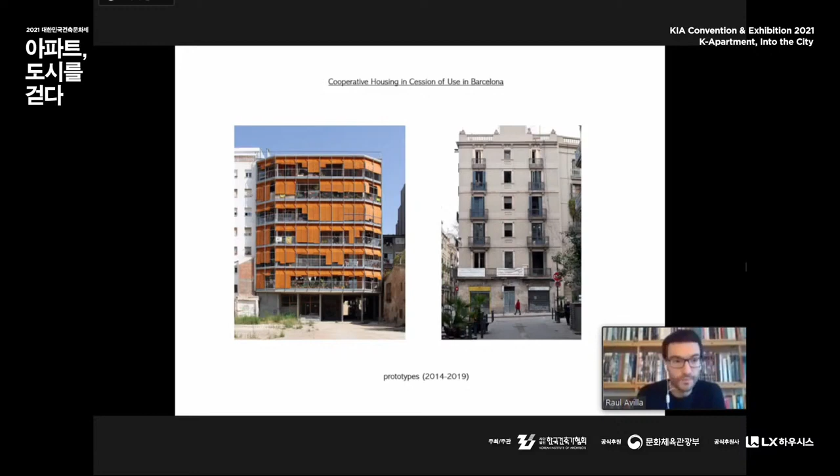Can Batlló, in this case, long story short, is part of an industrial settlement which had been claimed by grassroots groups as public facilities for many decades. Finally, in 2011, neighbors entered the premises and started self-organizing them with the permission of the administration, creating a number of working groups to address the public facilities, producing them in a self-managed way - claiming that since they were the ones producing and caring for them, they would be able to do better than the administration.

One of these was the housing working group, which produced the example of La Borda that I just mentioned, in this case mediated by a team of architects. They organized in an assembly - this is one of the first examples. Cooperative housing, in this case, cannot just be seen as a grassroots response to housing failures, but actually as a political project of democratization and social transformation, and this has a direct impact on how we understand housing.

In this case, dwellers decided to have less private space in their houses in order to foster these shared or collective spaces, given limited resources, referring to both budget and space. This produced a number of spaces which are actually extensions of the house, making the dwelling bigger than it actually is.

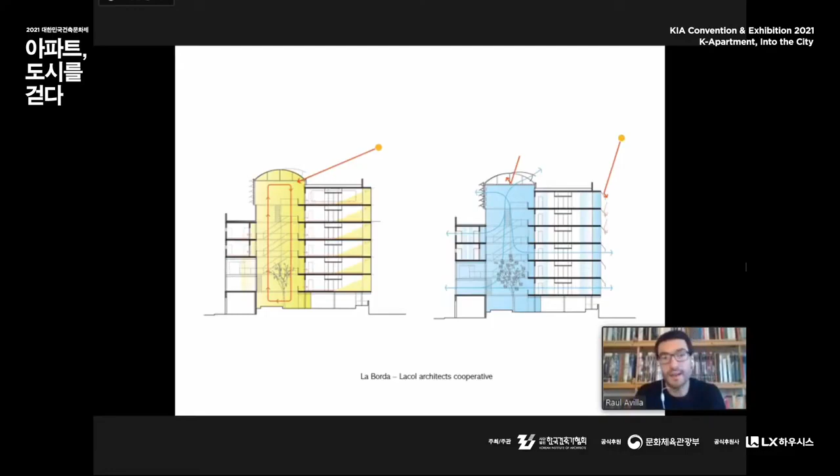One example was the design of a greenhouse in La Borda, which couldn't have happened in either private or public procurement. This was allowed since both ownership and management are collective, and it significantly improves the energetic performance of the building for the benefit of dwellers. On the other hand, it produces a pedagogical effect in the way users understand the carbon footprint of their own living.

On the other hand, the typology in this case is defined by three different sizes. As opposed to what we were looking at before, where household composition was predetermined, in this case that does not happen. There's freedom for users and households to interpret the dwellings, which are defined in relation to household size rather than composition.

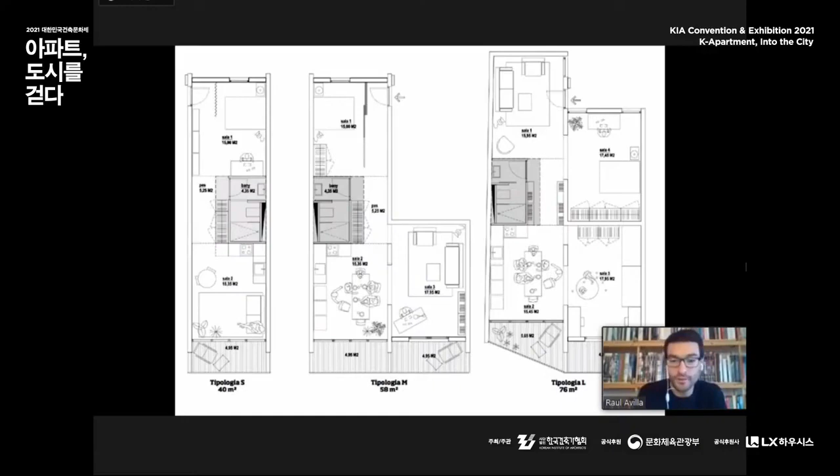In addition, there are some extra rooms that can shift from one dwelling to the other. So these houses are actually able to increase or decrease over time, allowing a higher degree of adaptability in the future. That's how the first floor plan looks.

Dwellings are facing south, where the sun comes from, while north is the place of utilities and shared spaces. If you look at this photograph, which is pretty much like a section of the building, you can see how these shared spaces are scattered throughout the building, allowing a higher degree of access for all dwellings.

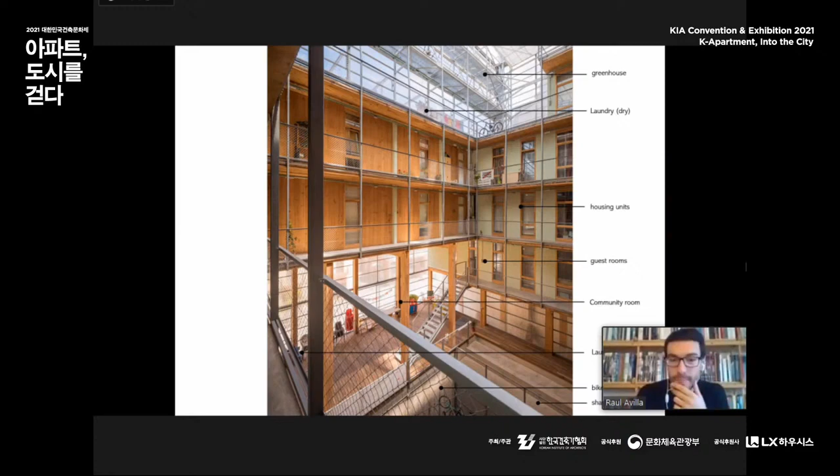These are a couple of images of the building I took a few weeks ago, showing how the building looks nowadays. You can see the appropriation of the shared spaces by dwellers, which responds to the high confidence they have in each other, and this feeling of community that allows the use of the shared space.

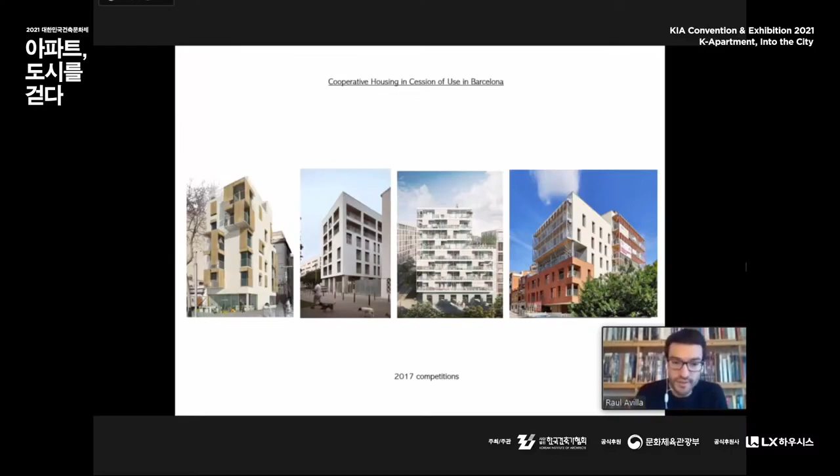After 2014, there were two other competitions, in 2017 and 2020, run by the municipality to foster the cooperative housing model. One example is La Balma, in the Poblenou neighborhood, and another is Cirerers. In this case, as you can see, both buildings, like La Borda, are built in wood, which is something new in Spain, and actually makes construction more expensive.

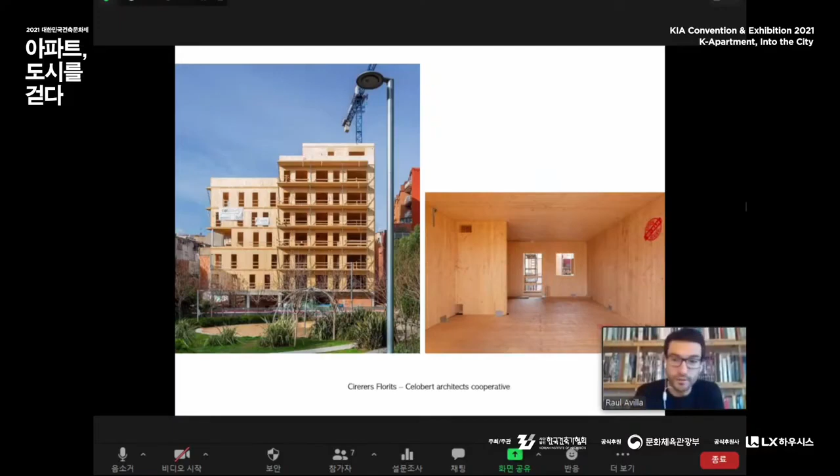So dwellers decided to build more expensively in order to have a lower impact in terms of carbon footprint. In this case, the building responds to dwellers' concerns, both politically and socially, in relation to the impact of building in our cities. The third competition took place in 2020, and in each of these there's a degree of experimentation.

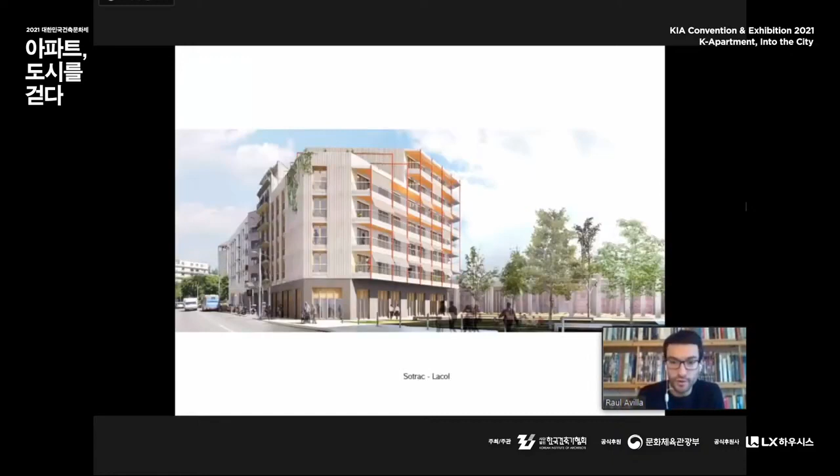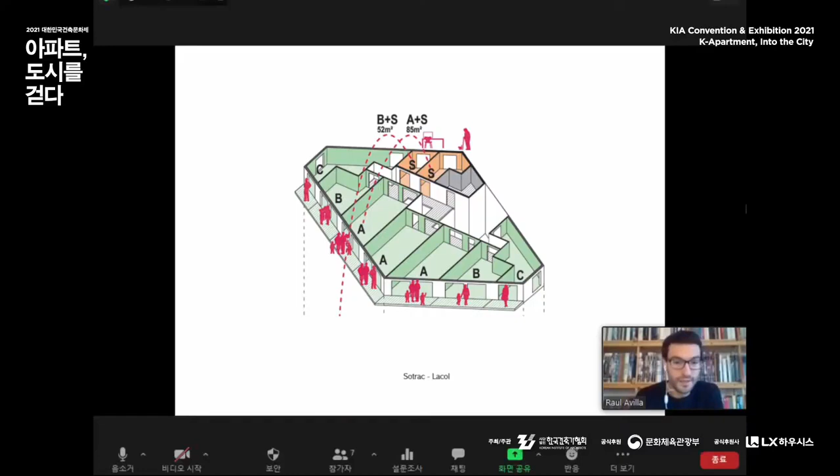For example, the Sotrac building by Lacol, also in Can Batlló, is experimenting on one hand with satellite rooms—how two rooms can be an extension of all these apartments we see here—and on the other hand with how the floor plan, each floor, can be understood as cluster living, in which the entire floor would be kind of a house.

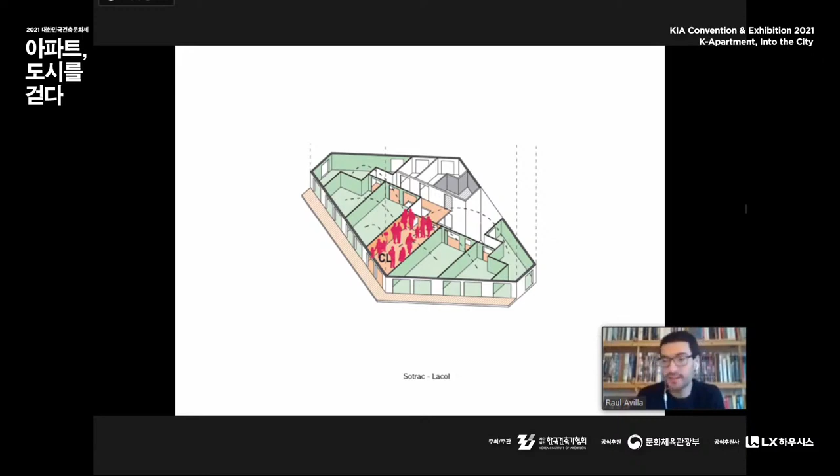This is a model that has been tested successfully in some other countries, for example Switzerland, but we don't have precedent for in Spain due to the legislative understanding of what a home is and who composes it. So that's how the building will look. Again, you can see the greenhouse on top, wooden construction, and the fostering of...

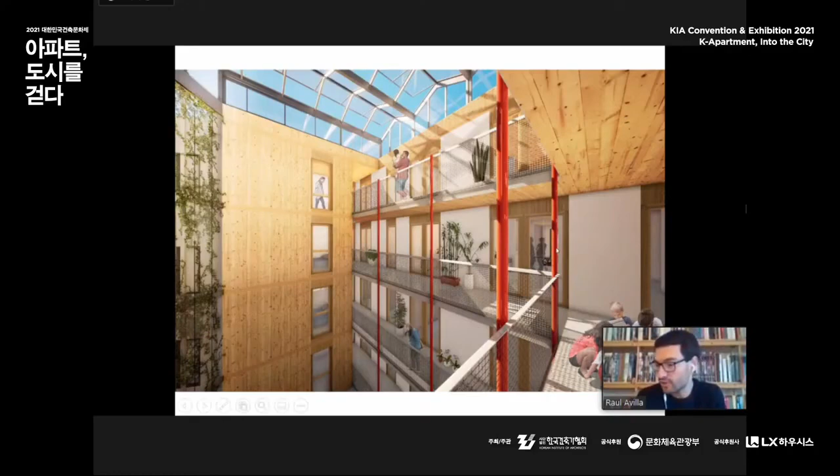The last example I will present is a building that I'm co-author of the design, which was also awarded a first prize, as the one I showed before. In this case, as in the previous one, it needs to be underscored the role of the active user and the awareness of what it means to live in a co-housing community. So we wanted to address the concern that we don't know how we will be living in the future in terms of household composition. So we designed a building which is neutral, and operates as an infrastructure, taking as a starting point Habraken's theory of infill and support. So pretty much the building was delivered to the community as what you can see now.

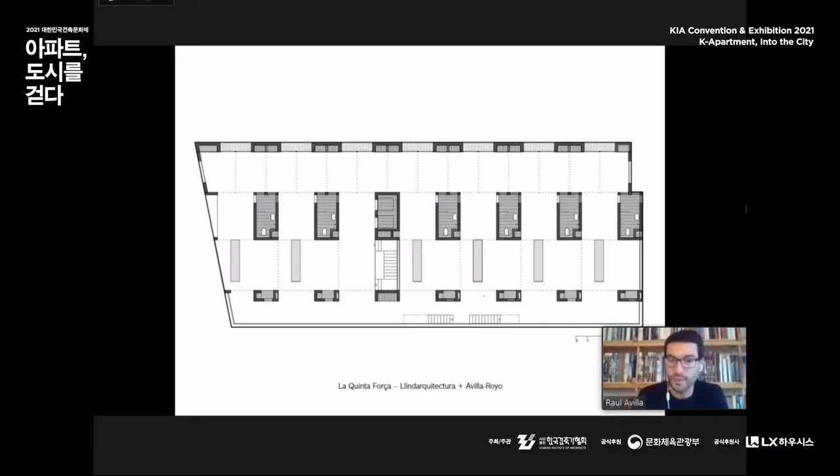So they could decide the limits of the houses according to a predefined system that was agreed with them in the first meetings. The building aims to respond to different situations and uncertain futures. So on the one hand, nuclear household, then extended household, in order to address problems like aging population and solitude, and be able to respond to multi-generational living. And in the last example, cluster living. The idea is that the building can take all these different forms over time, not only something that has to be decided at the moment of first inhabitation. This is possible thanks to the collective property and the collective self-management of the building.

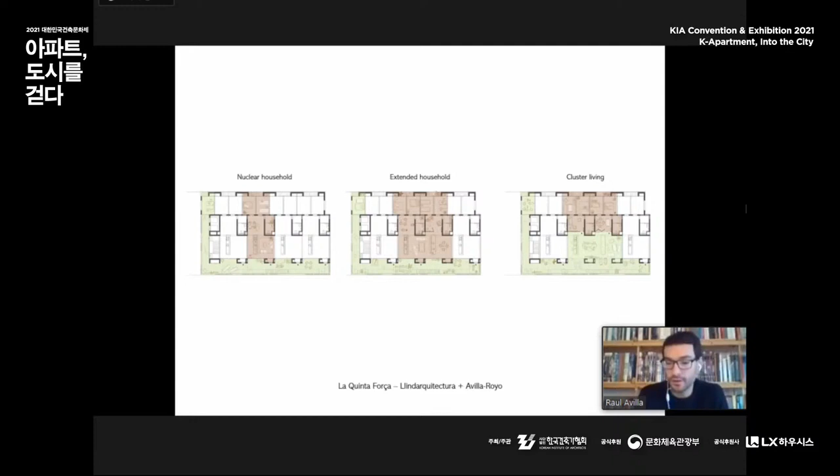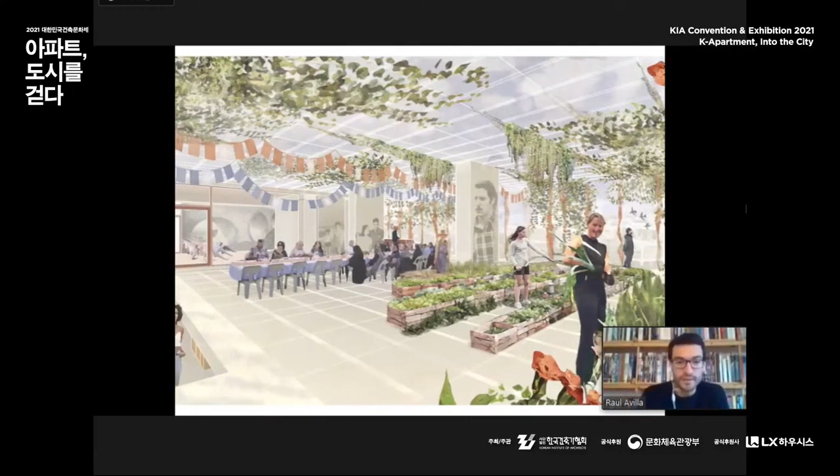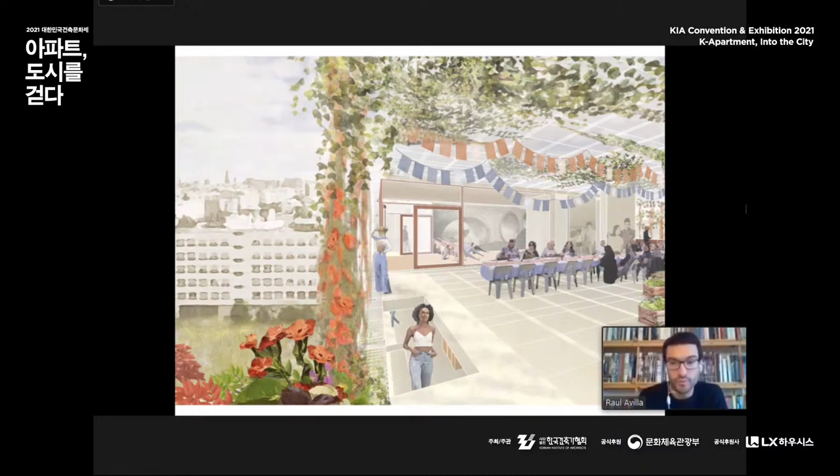So that's one of the potential outcomes of the plan. We already envision rooms that can be used in many different ways, where certain shared spaces are generously appropriated by the dwelling houses. And as in all these co-housing buildings, there's always a certain generosity in the shared spaces. In this case, the rooftop, as the most privileged area of the building, is where the community is meant to gather and enjoy together.

So to finish, I would like to introduce the research I am developing right now, which is my PhD about the role of architects as mediators and enablers in a disciplinary shift toward community-led architecture. This, of course, includes cooperative housing and how it responds to changing social needs. So this will become a toolkit of specific design methods that enable these collaborative architectures to produce specific spatial outcomes, resulting from distinctive design processes.

So I'd like to finish with this quote from Robert Sommer, which says: good design becomes a meaningless tautology if we consider that man will be reshaped to fit whatever environment he creates. The long-range question is not so much what sort of environment we want, but what sort of man we want. Thank you very much.

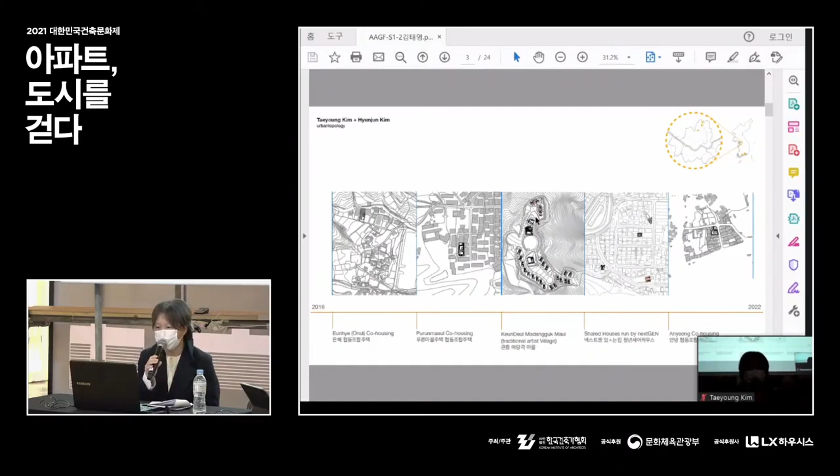The first community project is called Eunhye Co-Housing, which has been featured in the media many times due to its strong sense of community and as a model for a healthy and sustainable social family. The community had been formed for 10 years before they came up with the idea of co-living. They loved traveling and found it a way to create some sense of togetherness.

A site they found had a great view of Dobong Mountain, but its floor area ratio was lower than expected. To accommodate 50 residents, they decided to live like travelers, reducing individuals' belongings. It has a deeper meaning in that they wanted to change everyday routine into self-organized intellectual, creative, physical activities in manifolds, as loose and open journeys of individuals and small groups within one community.

The site, as you can see on the far left, is narrow and deep on the north-south axis. The core is located in the center, connecting the south and north units with the skip floors. 4 social families, we call them tribes in Korean, 부족, are formed out of 24 households, 12 couples, 12 singles, and 14 children, based on their common interest.

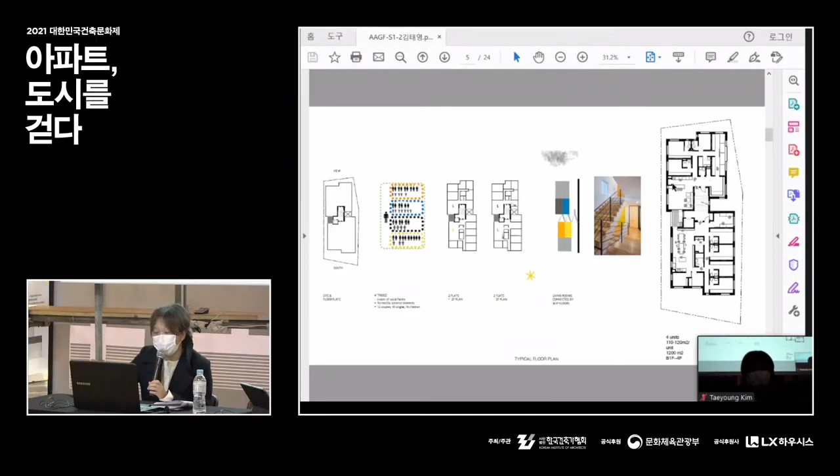So you can see the skip floors and the different colors indicating the 4 tribes and their living rooms in the center, surrounding this core.

Living rooms reflect the unique characteristics of the tribes. As you can see, the 4 living rooms are quite different, and they are open to each other. The basic agreement for this aim is to take off shoes at the entrance of the building and to keep the doors of the flats open.

This is a topological diagram connecting the second floor, third floor, and the attic floor. So there are 4 tribe flats here.

As you can see, circulations are carefully designed to provide loops, shortcuts, detours, and voids for visual connection and continuity. Constant negotiations of territories are expected to take place every day, making it unique in ever-changing and voluntary encounters.

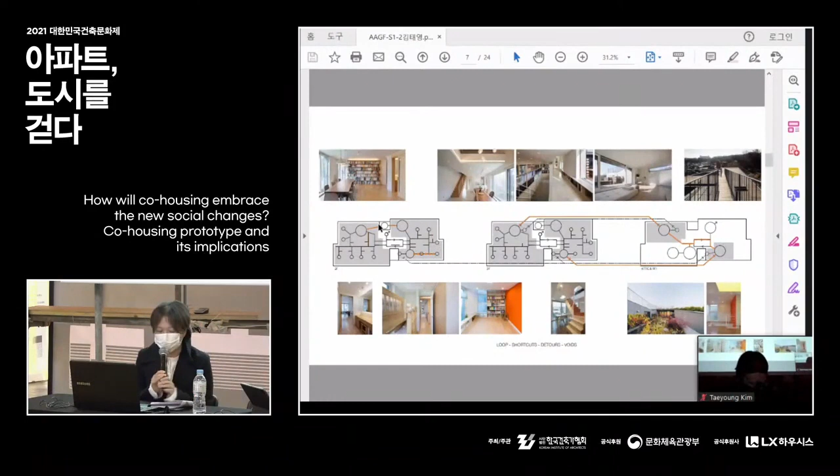The community activities include, but are not limited to, carefully discussed and designed communal spaces and living rooms over 6 floors: co-dining in the basement, assembly, alternative schools, diverse seminars and group activities, guest stay on the ground floor, cafe, Soho, manga lounge in the attic floors, tea room, garden on the roof garden, and north roof promenades.

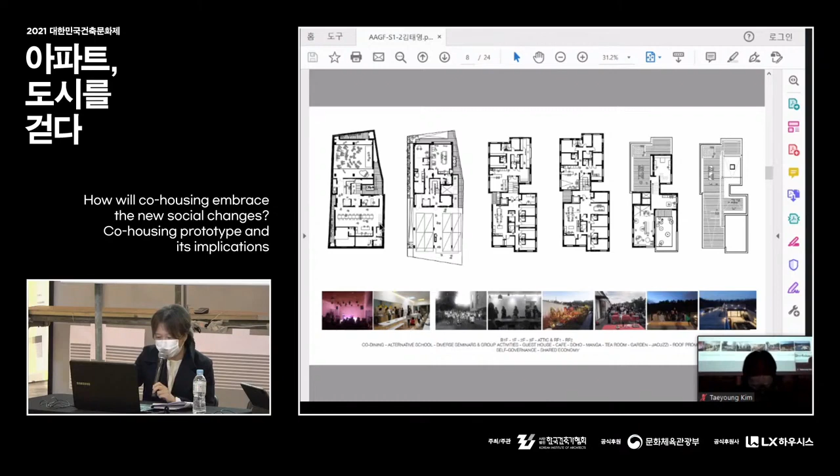And you can see the many activities that took place in the housing. It was featured in Brick magazine. I will show the video clips later after this presentation, if we have time.

The second project is called 푸른 마을 project. 9 doctors' families got together to live alone together. It's quite different from the community spirit of the first project. They share voluntary medical service, religion, and an interest in childcare.

In the narrow and deep site with a great view towards Bukhan Mountain, the challenge was to accommodate 2 floors of community programs, as you can see in the gray area in the section on the far right, and 3 floors of 9 flats, each with 3 bedrooms, LDK, and 2 toilets.

They wanted to overcome the disadvantage of the lower floors and the north or west facing flats by choosing their own neighbors and forming clusters. The neighbors are willing to share the memory of levels, views, orientations, and overall environmental qualities. The children will grow up together sharing such memories.

So the south flats, which have good orientation and views, would remain as they are, but in the middle they will do an L-shaped duplex, and the north-facing flat will have a scissors duplex. As you can see in the 3 plan drawings, the unit plans look quite complicated. The construction company called it like a circus of reinforced concrete structure.

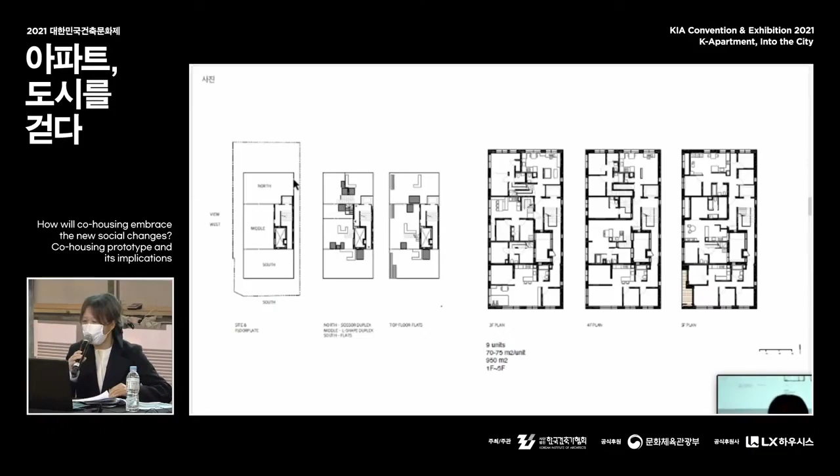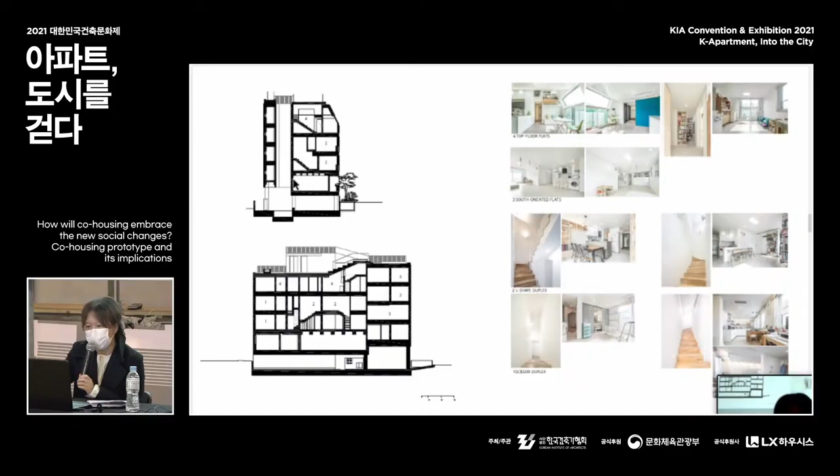The communal spaces make a vertical journey from piloty playground, office, assembly, daycare on the second floor, and the duplex and flats over the 3 floors. The interior spaces are all different depending on the family's characteristics. As you can see, there are duplexes, L-shaped duplex in the middle, and south flats and top floor flats. From the ground, the first floor, and the roof garden, there are communal spaces across the 5 floors.

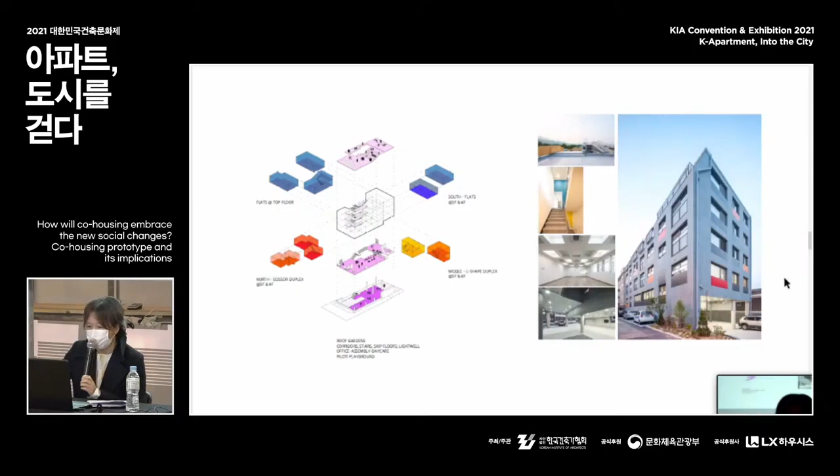The third community is called 안녕 in Korean, meaning be well. 5 families met at the same nursery, wanted to make their children old friends as they grow up. With a new family added, 6 families found a site near Dobong Primary School and decided to have cooperative housing. This community is quite different from the other 2 - they are quite new to each other.

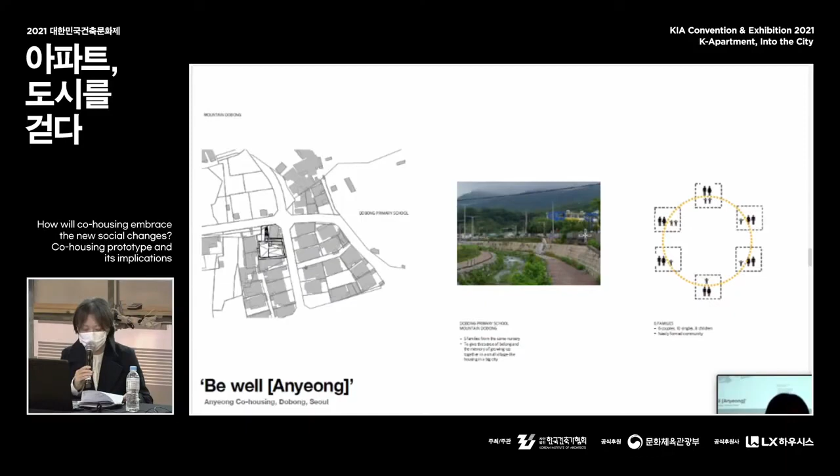With a view to Dobong Mountain to the north, the site has an irregular shape, facing a neighbor building to the south. The challenge was to utilize the north part of the site, populating the main access garden, the common terraces, and the roof garden. Their hope for their children's future to be well with friends, caring for each other in this society of prevailing individualism, starts with saying hello in the morning and evening, on the way to school or on the way back home.

Utilizing the potentials of the site fully, the core occupies the center of the built area, the floor plate, freeing up the perimeter for living. The layout of each flat follows guidelines of the 5 areas, including 2 corners. Wet areas are populated in the north areas. The rooms in the northeast or northwest corners are open to Dobong Mountain. The design is still in progress, developing the principles and variations for 6 families of varying lifestyles and family profiles.

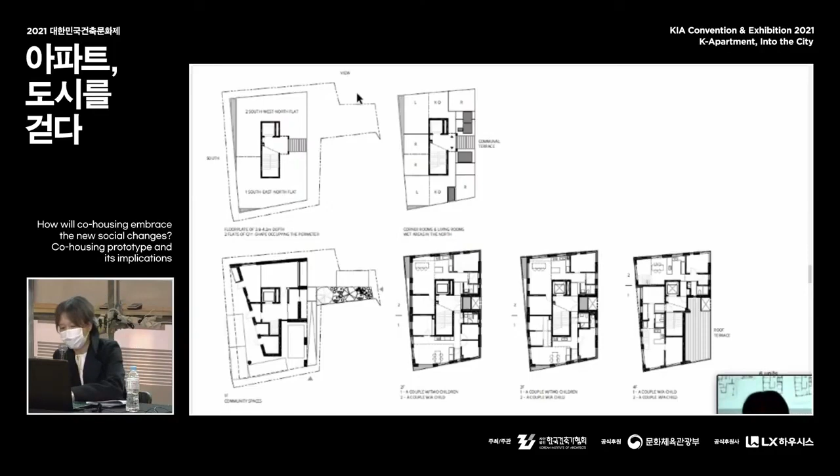The design is to keep the very different spatial experience of living in the perimeter, unusual in Korean housing prototypes, even after this community of 6 families agreed to move out in the future.

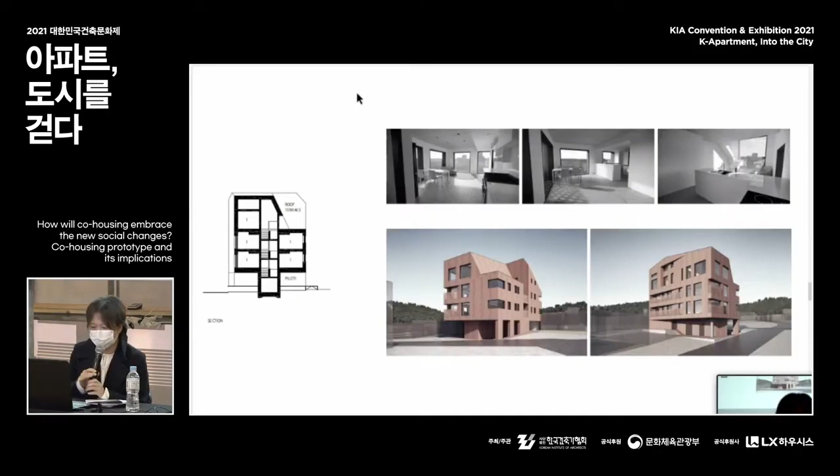The next one is called Share House Next Gen. Suncheon Municipality selected Next Gen, the activist group for ecology living, as the operator of the 4 shared houses owned and remodeled by Suncheon Municipality. The 4 houses were bought among the empty houses in the neighborhood without clear relationships. We started the design process by communicating with NextGen, reprogramming the 4 houses with new connectivity and continuity.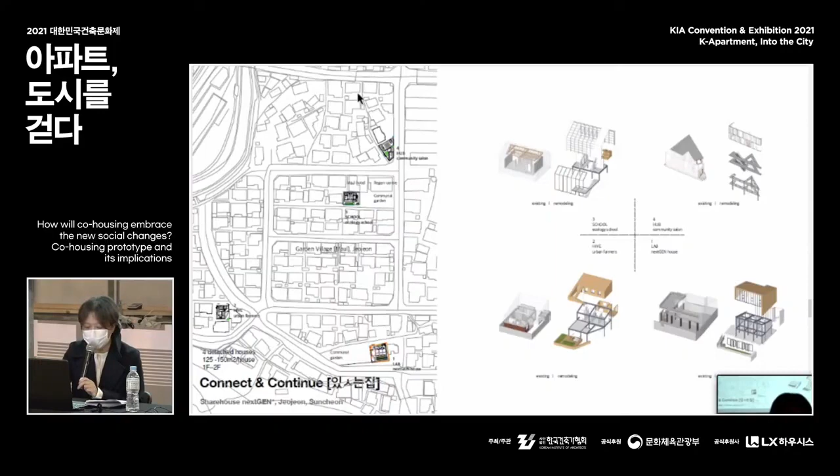Some features from the development of 30 years were maintained and refreshed, while their spatial characters are revitalized with new interventions - new structures, roof, added floors, gardens, roof gardens, and public stairs and promenades. As you can see at the top, there are the existing house types with the brick structure, and the colors are old features that remain, while the others are all added as remodeling.

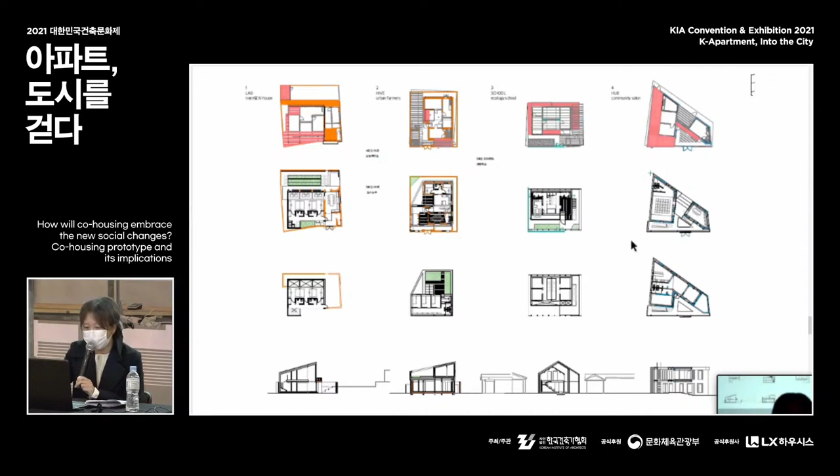The 4 programs - home, urban farming, community salon, ecological school - will be connected, and they are under construction now.

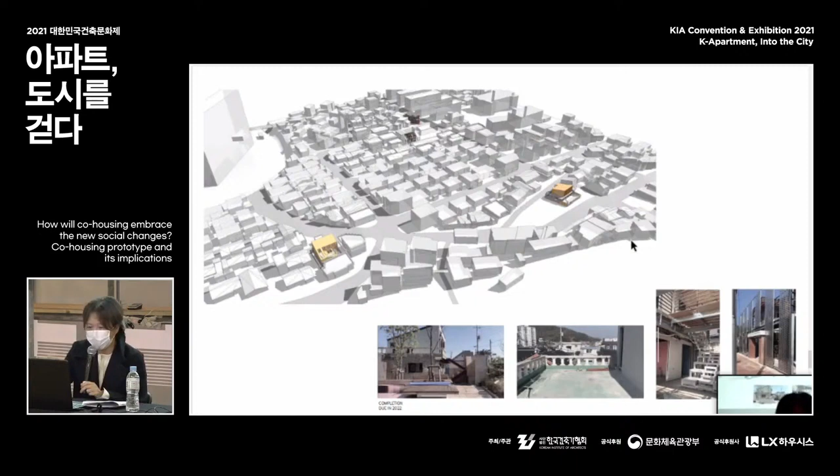The last project is about migrating artists. Kundul Artist Group is made of traditional performance artists called Madangguk in Korean, and their supporting organization. They share art education, farming, and gardening, pursuing integrity as an ecological community. Relocating them from Jinju to Sancheong, they dreamed about a village where they perform and live together. As they work daytime, from working on scripts, costume making, stage production, practices, performances, they wish to have their own time during night in private settings - so 20 detached houses.

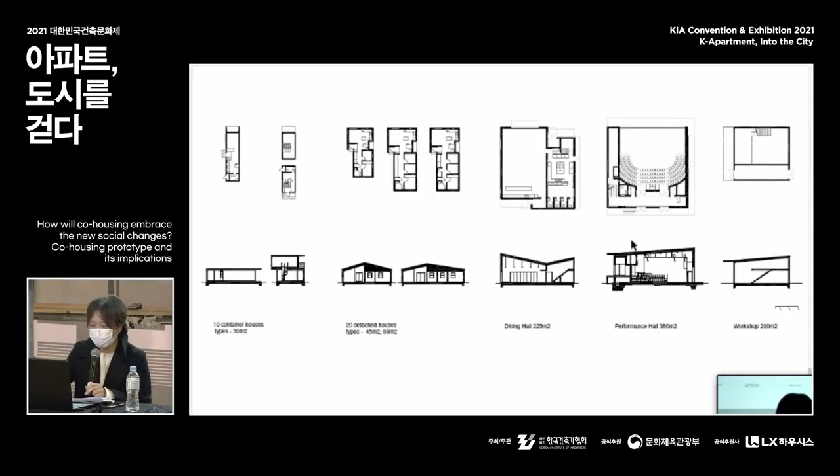These are the types we developed for 20 detached houses, 10 container houses, 3 community facilities including a performance hall. The houses had to be low budget without compromising the qualities, so the scale contrast was another challenge. Further, a balance was required between differentiating artist houses and their performance spaces, while integrating them into a collective landscape. The master plan was done prior to the architectural design stage.

Each house is unique with its changing topography and relationship with the neighboring houses. The funny thing is, the artists will migrate to the next door every 5 years.

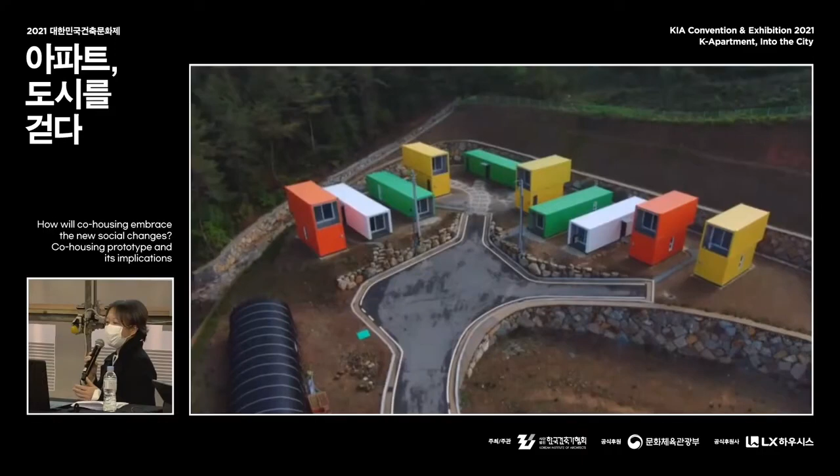The challenge was that the artists use this space as a performance, but also they have their private houses as well. So how to show their houses during their performance was a tricky thing. But the good thing is they use the sunset and nighttime for their performance, so the houses disappear during the concert.

Very simple system for the house. And the living room and the porch near the dining space provide some views towards Cheonwang Peak.

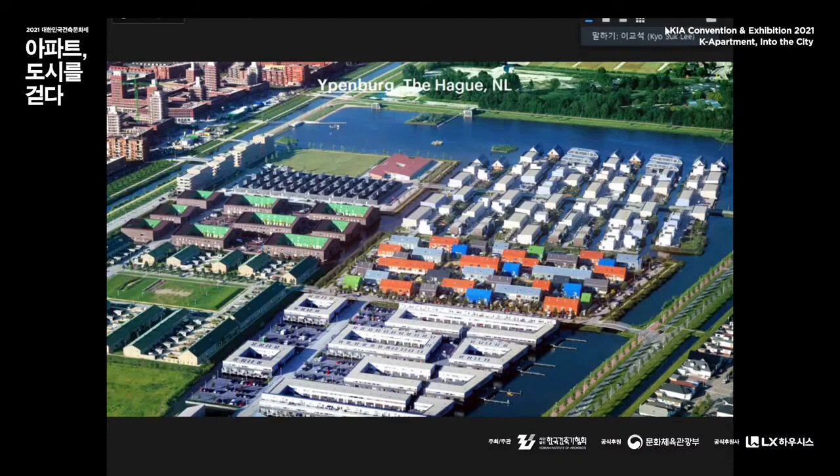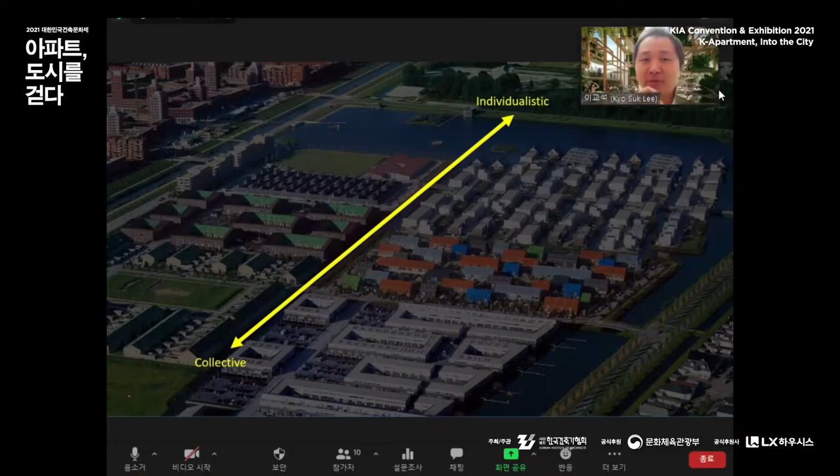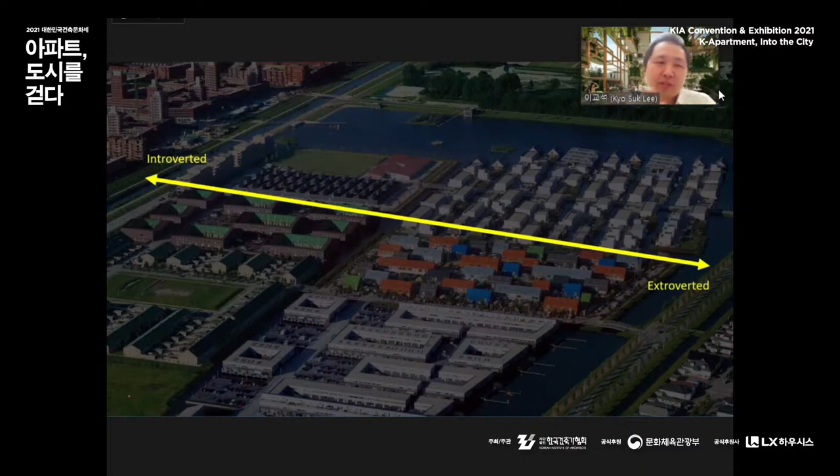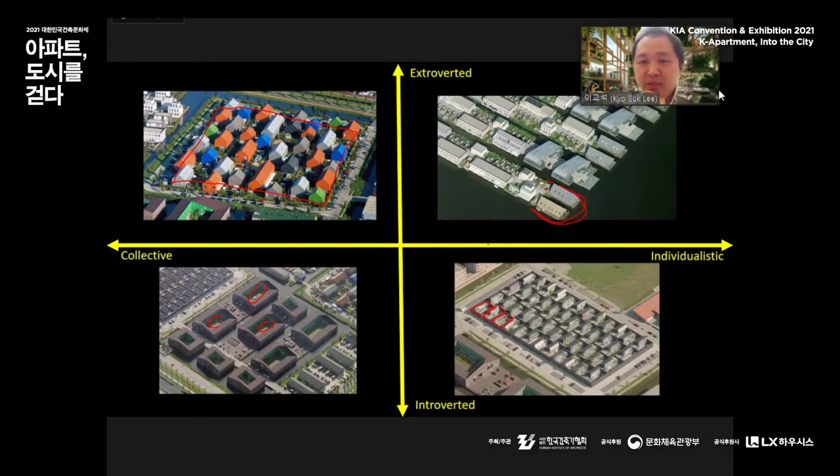This is one of the early suburban housing projects that we made in Den Haag. Here we asked ourselves, what is the reason why people escape from the city center to the suburban context? We found out they all have different intentions and different needs, so we tried to invent a very diverse typology. One way was to make one side more collective, the other side more individualistic. Another way, one side more introverted, the other side more extroverted. This is the type we imagined with the required density. One of the collective extroverted types has an almost shared, car-free, endless shared garden. The collective introverted type has 8 or 10 houses sharing their own courtyard. The extroverted individual type is very much exposed to nature. In the extreme case of introverted individualistic, every house has its own castle, almost like an enclosed garden without revealing any of their property. So this is the variation. In one extreme case, that's the best place for a family with young children, with no border between the houses - they share the entire ground level almost as a playground. In the extreme case of the other side, it's completely protected, but they enjoy their own individuality within their garden.

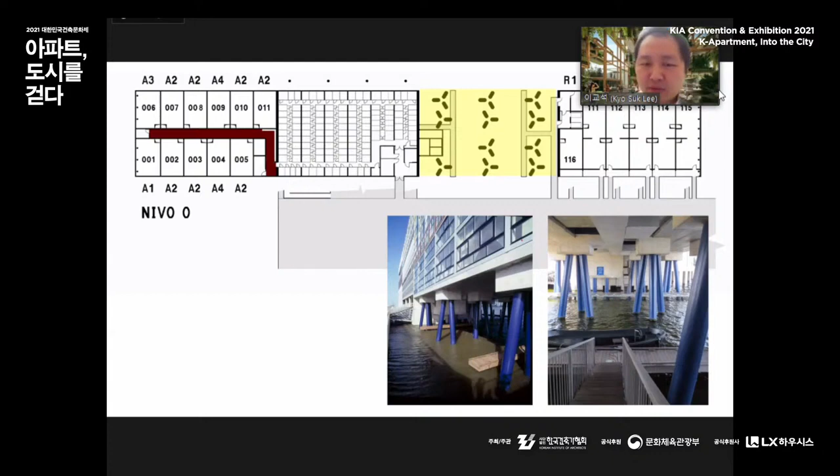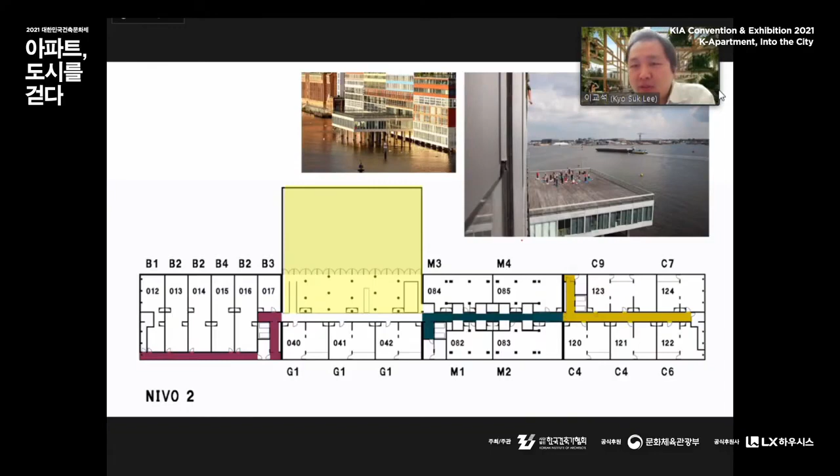This idea was also developed in a three-dimensional way - that's a project at the Silodam, built on the water. In this project, we tried to bring in many different needs of contemporary housing, invested in by many different housing cooperatives. We brought almost 25 different housing types according to the new needs of housing at the time in Amsterdam. So this is variation - some of the housing has a duplex, panoramic view to the water, or a patio, or is accessible by stairs from the ground level. We tried to bring some collective space like a harbor, so people could commute from this housing to the city of Amsterdam. Also, though it's a very narrow site, we tried to bring a deck on top of one of the office tenants, so it could be used as a collective plaza - every weekend there's a yoga activity or other sports activity. This housing is almost like a labyrinth, a combination of all different kinds of housing typology. You can see the second floor plan.

It's a very individualistic project, but we try to bring a certain sense of collectivity. This floor is specifically designed for senior citizens. We intentionally promote a certain space so that residents could have social encounters with the neighbors in this space.

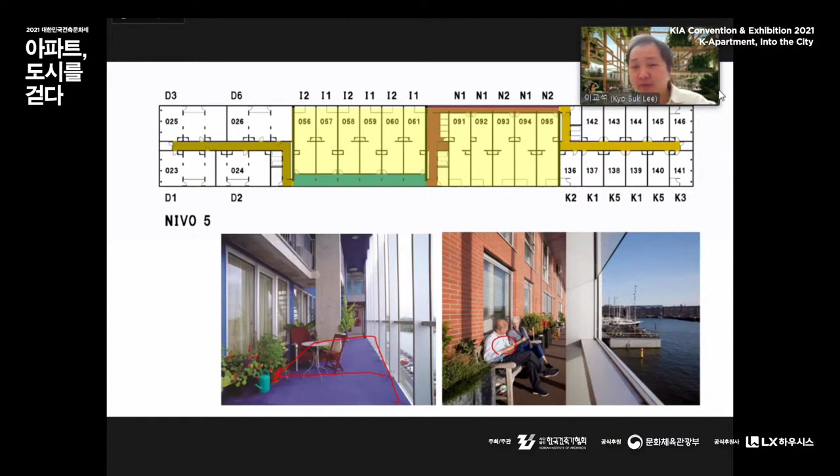After handing over the building to the neighbors, we found an interesting phenomenon: this space is not what we designed, but how they reinvented it. Since we have many duplex units in the building, some floors don't need any elevator lobby, so that space was abandoned.

And these people try to use that as a collective library or a collective gym themselves. So we were thinking this project is quite about diversity and individual needs, and it eventually creates the will to share the space and to operate it together.

This intention is also being researched at TU Delft, where we are operating a studio. The We Go project is a project with students exploring how individual needs could be negotiated and also physicalized in collective housing in an academic sense.

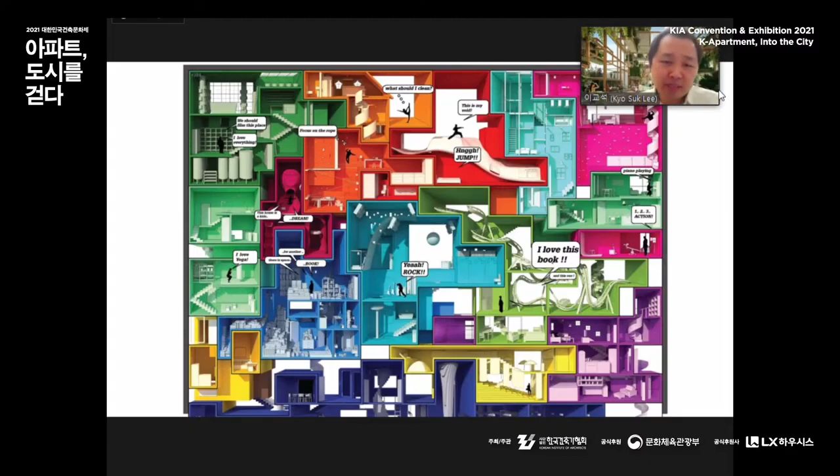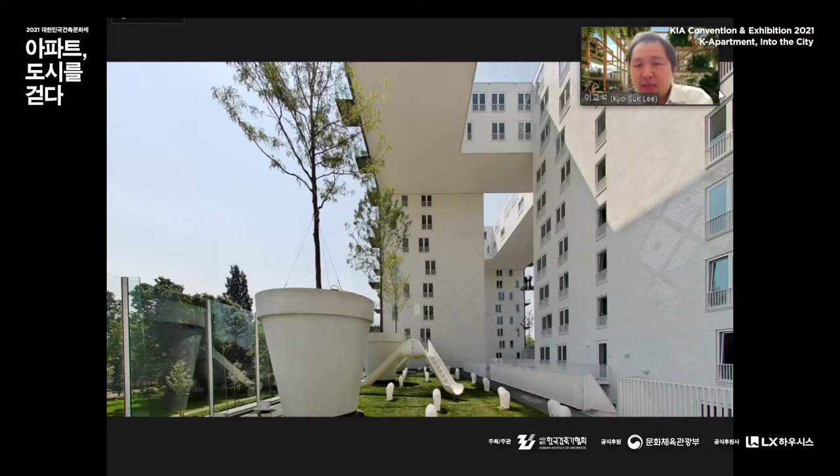The second subject we were focusing on is collective space as a void in collective housing, which we call porosity. In the first project, in Amsterdam, you can see five towers making one volume, so the housing itself becomes a room. Between the towers, they are connected and make a frame for the view to the outside, to nature, and to the city.

We bring a series of collective spaces. In this case, we have the playground for the kindergarten - you see the chandelier there. This is the kitchen space, and there's a living room. So we call this housing for 200 units, but they're living in one house.

Another example, in Madrid, we try to use this porosity, the room, for the view, to look over the city and to meet each other in this fantastic view.

Another one, also in Madrid, in the Celosia. In this case, we try to make an intimate void space where one, two, three, or four units could meet each other. We didn't define the function - they could invent their own program in that shared garden.

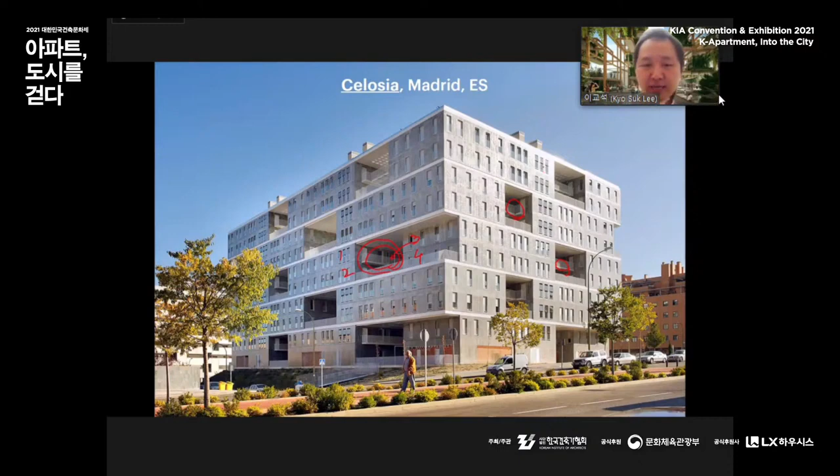This is how it looks around the courtyard. They bring ventilation and daylight also to the courtyard.

Another thing, in Lyon, France - in this case we tried to bring a street shared by the housing and also tried to bring a view to the water. You can see these streets are lifted because there's parking below, and this is almost like a semi-public space where collective events and social encountering could happen.

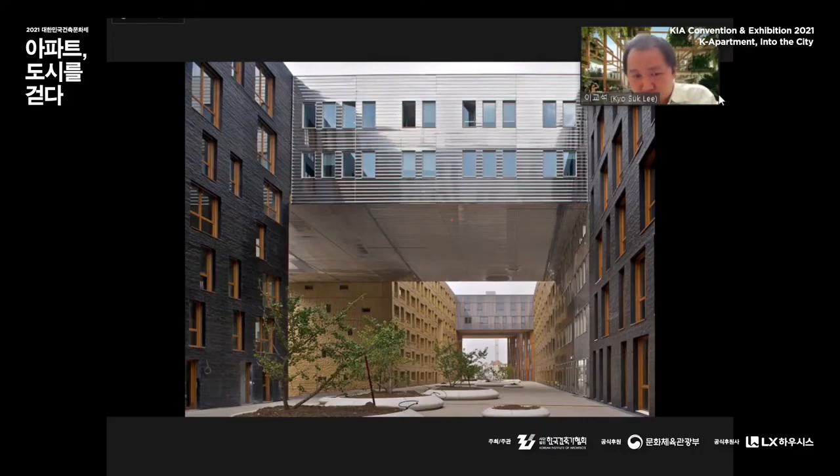This subject of porosity is also deeply researched at TU Delft, under the name of porosity. Here we had an academic setting to experiment with how the tower, the residential tower, could have a void space in many different ways, bringing many different possibilities, and also challenging the typical tower typology - how it could have more air.

The third subject is how green space could be used as a collectivity. This is one of the projects we are finalizing in Amsterdam, called Zuidas - we call it the valley because we were inspired by the natural valley. So we were thinking, what if people living in the valley, inside the valley, share the forest and share the mountain.

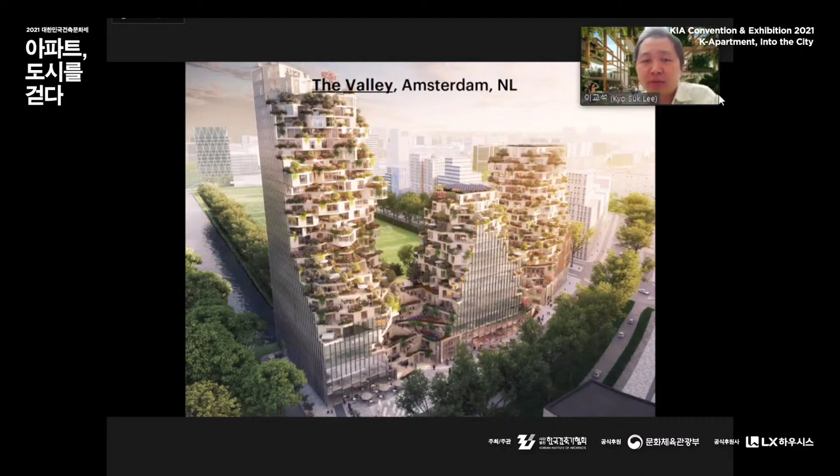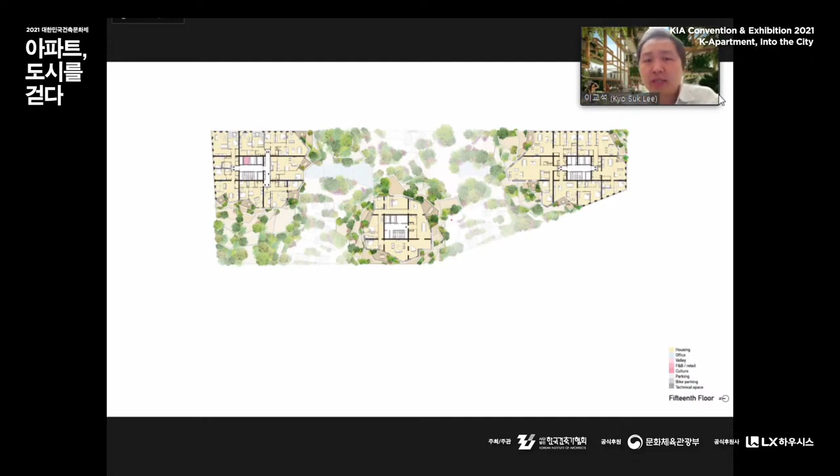The typical floor plan is quite simple - it's a typical residential tower, but every unit has its own balcony toward the garden. So it's a collective forest, as I emphasize. This is a view from one balcony to your neighbor's.

And then we try to do something more. Comparing it with the previous project, it's quite a luxurious housing - that's what the Dutch housing market is doing now. We try to bring a certain collectivity also with the neighborhood. It was a very hard process with the client.

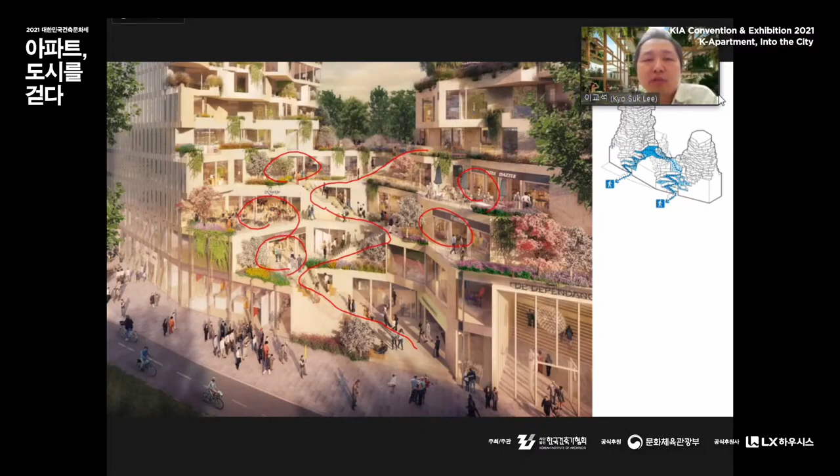But the logic was to try to open the podium more, to make it welcoming to the surrounding area. So one way we did this is letting people climb over here, but this will ensure the commercial success of the tenants. And in this way, this valley becomes almost like a public destination, where we share this collective feeling with the city.

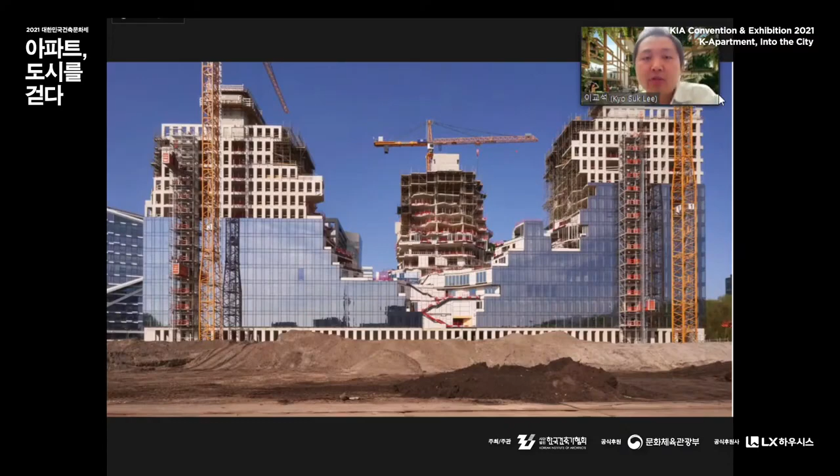This building is almost finalized, more than this image. Soon it will be published. Another project in France that we are a bit more experimental with.

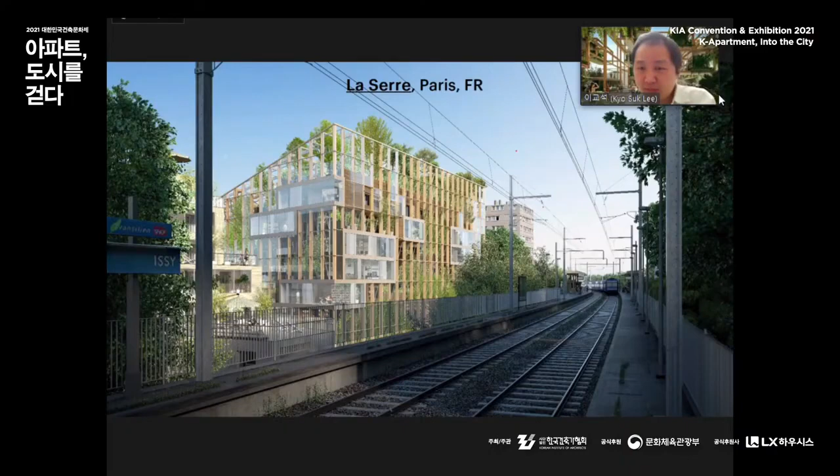What if this housing itself becomes the greenhouse with a shared space? The greenhouse was needed because it's next to a train station, to block the noise and protect from it.

You could see the stack of the different housing units making almost one continuous climatized communal space next to each other, embracing a new way of sharing. The greenery will be maintained by the residents themselves, becoming the ultimate binding factor of the community.

The last category we are working on is mixed use: how housing could meet with other functions to bring new collectivity, not only within the housing, but to bring that collectivity to the city.

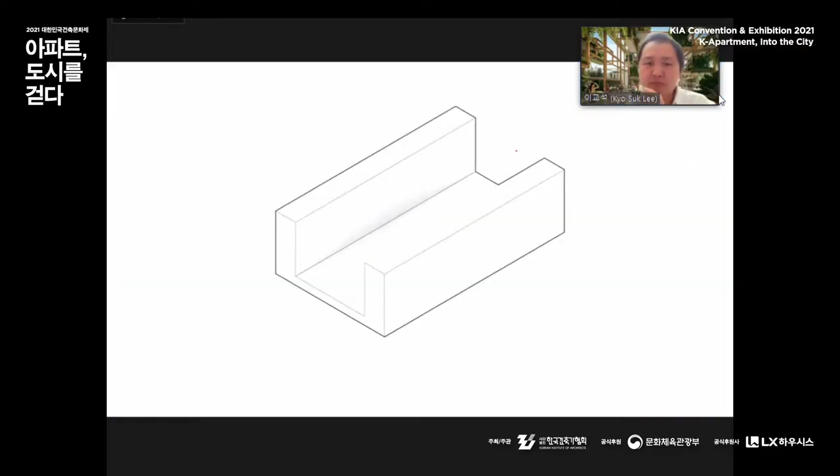In the Netherlands, there's a huge discussion about how to bring the population who escaped to suburban areas, like in our first project, back to the city, showing an intensified lifestyle in the most creative way. This was a pilot project in Rotterdam, exploring how a public facility like a market could be shared with housing together.

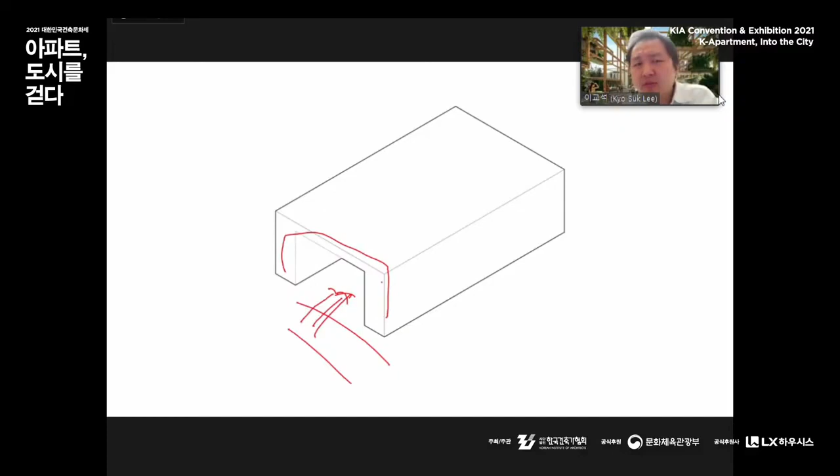In the competition it was a very simple request: make the housing on top of the public market. But we brought a different idea - what if the market continues from outside to inside, and what if the housing covers the space? Then we thought maybe it's structurally difficult, what if there is an arch?

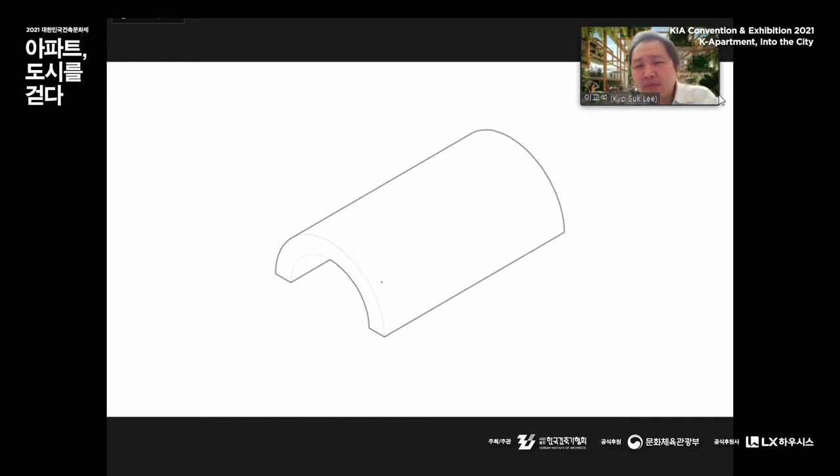The elevator engineers said it's not possible, so we modified the form - we even modified it to have more commercial space at the ground level. So we made a 120-meter deep market.

In section, this property is shared by almost 130 shops in the first two levels and 200 housing units on top, and they are connected. The penthouse sits on the bridge of the building.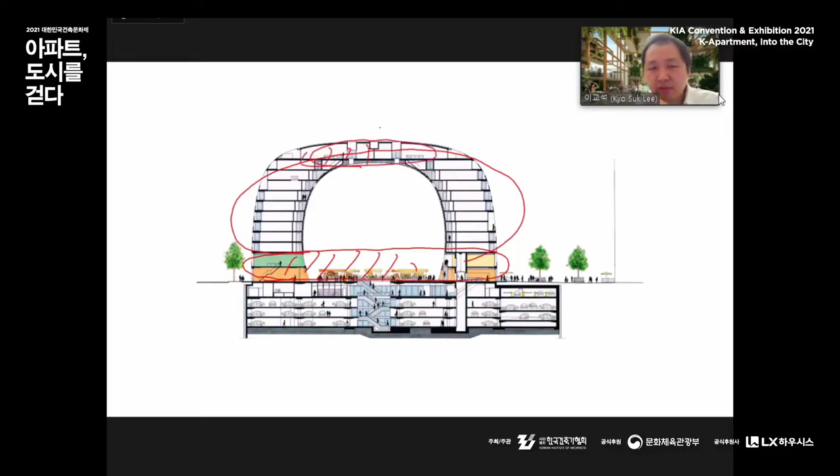This is how it looks from the side - it looks like a typical apartment block, but inside you see the market with people coming in. All these windows are windows from your living room - this is a view from your living room, and this is a view from your bedroom.

So it creates a collective space together. It even celebrates the new, emerging food culture in Rotterdam that wasn't common before - many different shops with intimacy, but you can feel the collective feeling this building brings to Rotterdam, especially seen in how it looks when it's busy. This is an overview.

That was our message from MVRDV, how we interpreted the middle class, upper-middle-class typical housing that is in demand in the European housing market, and how we bring new collectivity to projects in different ways. Thank you.

Hello, do you hear us? Yes, yes. Just a minute. No, it needs to be put on full screen.

It's okay. Yes, good. Sorry.

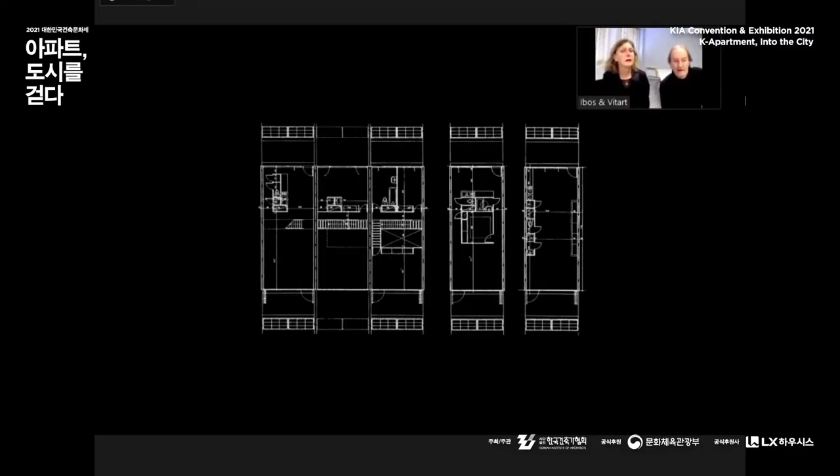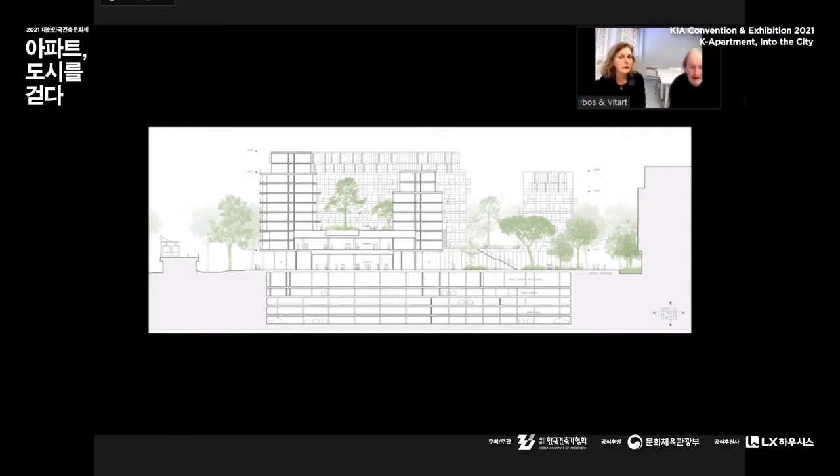To minimize the expenses of structure, and to give something more, we try to extend the apartments on the outside, in 2 levels I could say. The first one the private, and a common sort of huge deck which cover

the commercial area on the 2 first floors of the building, and the deck is a shared space overlooking on one side the river, the Seine, and on the other side the park, which structures the new neighborhood of this part of the suburb.

You see also how the public space enters the building with a large, huge canopy at the ground floor, and in a private way we extend the apartments with this kind of device, which is a large terrace that you can modulate in winter, or in summer you can open or close with a glass wall, and it makes an extra surface to the apartments. And the other thing is to use also the materials.